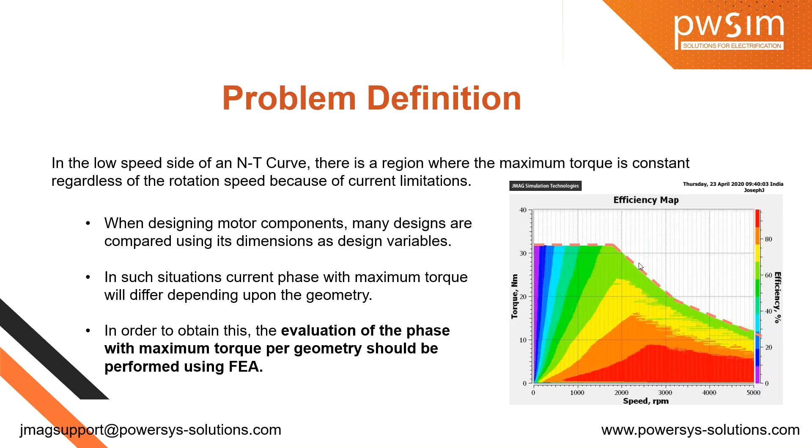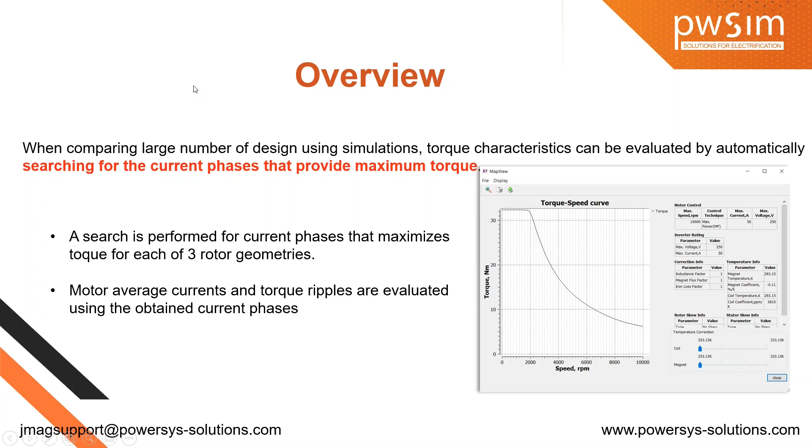So in the analysis, we'll be comparing three geometries. So it won't differ in the stator dimensions. Here for the sample we have taken, we are changing some of the parameters like magnet width and the position of the magnet from the center, and also the slit angle available in the flux barrier area. So these are the general assumptions which we have taken. So here the inner radius of the stator or motor thickness are approximately the same. So we are not considering much of the casing part.

So coming to the analysis model, as you know, we are considering the 2D model here in order to reduce our simulation time. And the partial model is done because here, as you know, the number of poles are 8 and number of slots are 48. So when we are taking the LCM, or least common multiple, of these two factors, we will get the periodicity as 45-degree angle. So the magnetic flux and all other contours periodically change.

Joseph, Sadeep here. Your voice is breaking in between. Can you come a little closer? Yeah, okay. Hope I am audible now. Yeah, now it's clear.

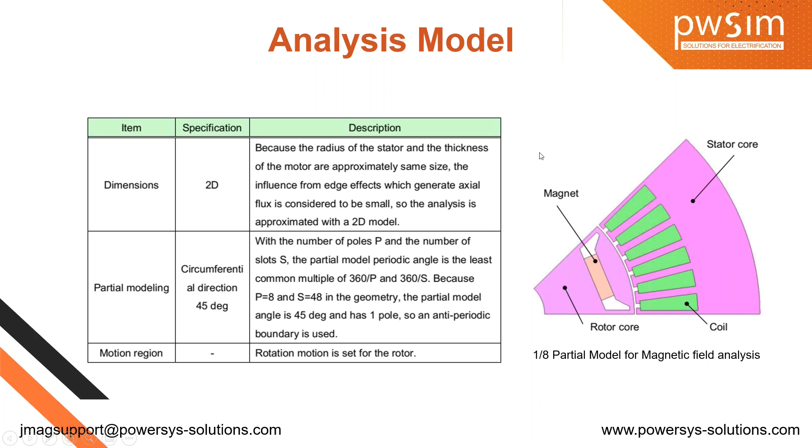So coming to the design variables and evaluation geometry, as I have already explained, you can see three geometries here. The first one is geometry 1. There you can see the position of the magnet is coming closer to the outer periphery of the rotor, and you can see some of the slit angle differences compared to the other two. So coming to geometry 2 and geometry 3, you can see the magnet width and slit angle are changed, and performance analysis is done for all three rotors.

So coming to the studies performed, you can see here in the first stage, we will be going through the inductance calculation and current phase search study. And in the second analysis, we will be getting the optimum current phase from the first analysis, and we will be performing the analysis in order to get the average torque and torque ripple values. Coming to the third analysis, we will be comparing the results of the calculation which we have previously performed with the analysis done with the FEA simulation.

So even though all these analyses are done in JMAG Designer, we will be having some scripting in the first analysis. So we won't be getting deep into the FEA in the first analysis. But in order to plot the torque and torque ripple curves, we will be doing torque analysis study 1. So in the later stage, we will compare torque analysis study 1 and torque analysis study 2.

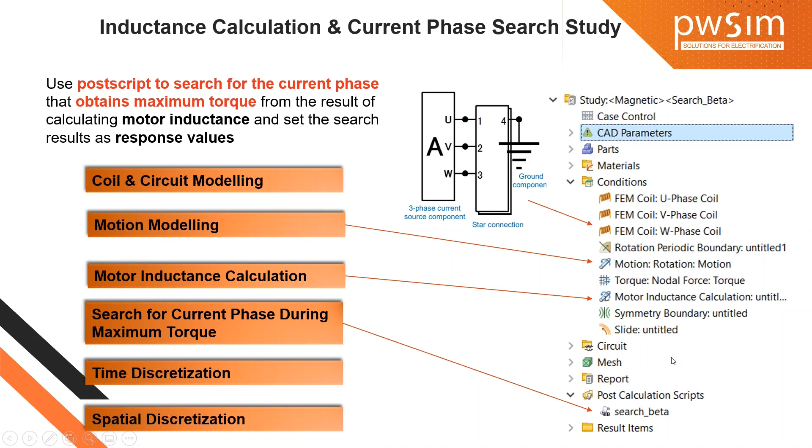So coming to the current phase results, we are automatically running post calculation scripts in order to obtain the torque value for each current phase, and we will be setting the current phase where the torque obtained is maximum. So this value beta is saved or set on the response table for further analysis. So as you know, this is the torque equation which I have already explained, and there you can see the phi value where phi f is the maximum armature flux value here.

So coming to the post calculation script. As I have already explained, in the post calculation script, you can see a VB script here. So this is the thing which I am going to explain just now. So here you can see in the post calculation script, the data are defined, or you can see the phase, Id value, Iq, Lq, Ld, flux and torque values are defined according to its data size.

So it is called for and defined like that, like a dim flux. In the bracket, you can see the type of data. So in set app equal to designer, the function calls GetCurrentStudy. So in the next analysis, we will be getting the data input from the current study.

So case number we are getting from the analysis, from the existing case which is executed there in the analysis, and division beta is also obtained from that analysis. So overall we can see case number, division beta, and number of poles are retrieved from the JMAG application study.

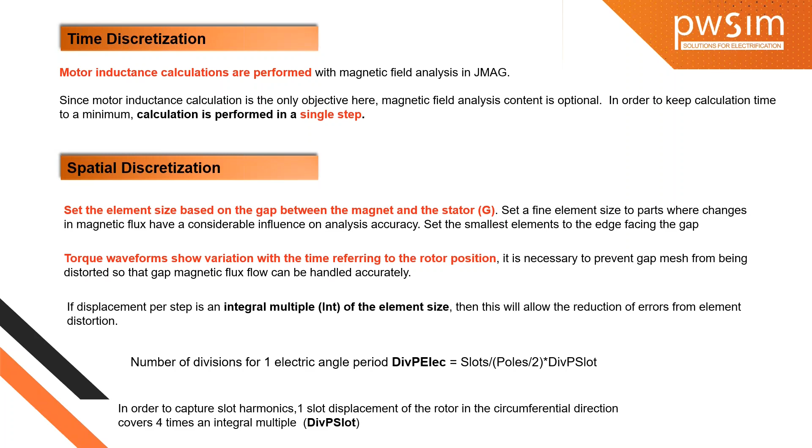So we'll set our divisions for one electrical angle period equal to slots per pole by 2 into divisions per slot. In order to capture the slot harmonics, for one slot displacement of the rotor in circumferential direction, we can see it covers 4 times integral multiple. So circumferential divisions is equal to the divisions per one electrical cycle multiplied with an integer value in order to avoid the calculation error. And you can see here only half electrical angle is taken in order to cover this circumferential division analysis.

Apart from that, we will be setting a rotational periodic boundary here, and we can see the symmetry for mesh also when we are setting the rotational periodic boundary here. As I have already explained, we have gone through the inductance calculation and current phase search study. So we already received the beta value and also the case number from the existing analysis.

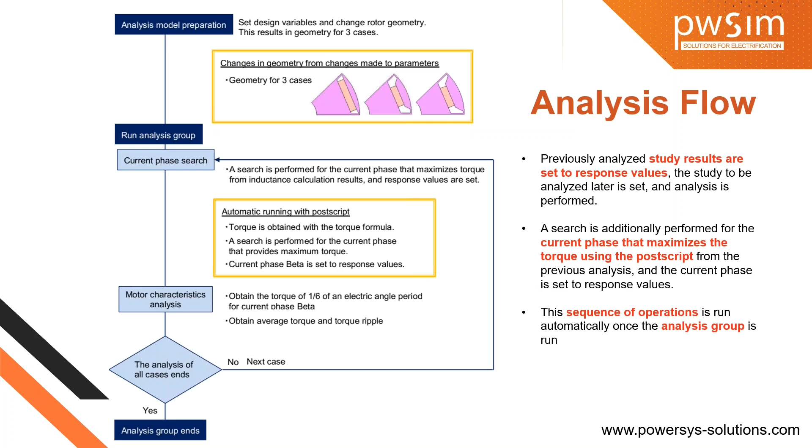You can see here, we started with inductance calculation and current phase search study, and we are coming to the next analysis, the torque analysis. The results which we have received from the inductance calculation and current phase search study are fetched into the torque analysis study 1. Here you can see the beta and case number is noted, and it is given to the torque analysis study 1.

In the properties of this current source, we will set this value for optimized beta. In the red indicated portion, you can see the beta value here. To evaluate torque characteristics and obtain the average torque and torque ripple value from the existing calculation, we are doing this FE analysis. No other details are changed compared to the previous case. Motion modeling is same as the above.

Circuit modeling is done here, and time discretization and spatial discretization are the coming modeling data. So here we'll start with the motion circuit modeling. Here you can see the beta value which we have retrieved from the post calculation script or from the initial analysis is given here in terms of a variable known as beta.

Coming to the project manager window, our aim is to generate response data with respect to each case. We will be generating the torque average and torque ripple, and we will be plotting the graph according to these particular values. So this is how we can see the values. Coming to the time discretization.

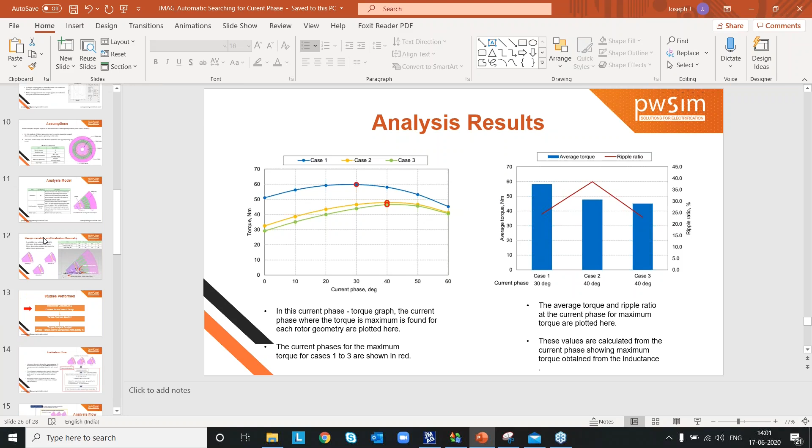So here you can see we have created an analysis group, as I have already explained. So here in the initial side, you might have gone through the analysis group. So this is the analysis flow, and we have created a group for that. So in the first analysis, you can see two studies have been performed within this group.

So as you know, an analysis group can be created by right clicking on the project model, and you can see create analysis group. So the main advantage of this analysis group is we can have a sequence for the operation which we are going to perform. So here, if I am editing this analysis group 1, you can see in the order, I have performed the operation for searching the beta, and I have performed the motor NT calculation, basically based on the FEA calculation. So these two studies have performed in a sequential order.

In the first phase, it is retrieving the beta value, and in the second you are getting the torque value. So this is how we can perform the analysis. So here you can see the studies which are coming under the analysis group. The first one is search beta. Second one is the motor NT curve analysis. So here you can see I have already run the model in order to save the time.

So here you can see I have registered the beta value which is optimized from the post calculation scripts. And in the second stage, I have created torque average and torque ripple value for the existing beta case. So here I have plotted that. So you can see here.

So here you can see in the table we have performed analysis for 3 rotor geometries. So the beta values which we have returned from the post calculation scripts are as follows. For the first case, it found 30 as the best optimized value, and for the second rotor geometry, it is found that 40 is the optimum value for the beta. And in the third, you can see 40 again. 40 is selected as the best beta value for the current analysis. So according to that, you can see the torque values also here.

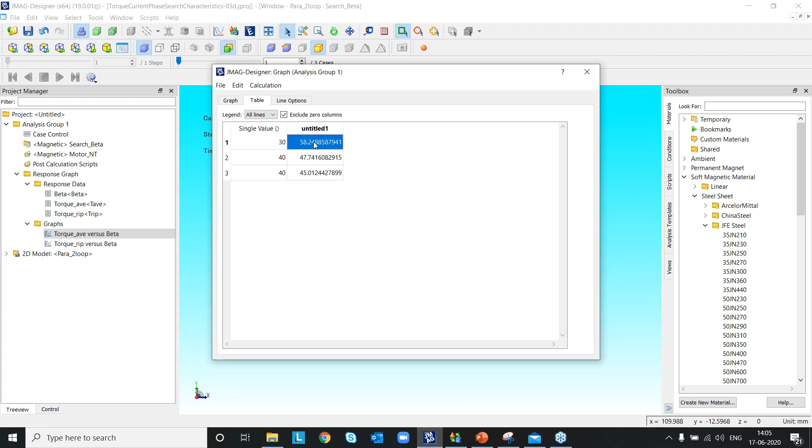But again we can see here the maximum torque is obtained for the rotor type of case 1. So maximum torque is obtained for this particular rotor geometry 1, and there we can see the average value which we have received is 58. So this is how we can see the results. So coming to the graph, you can plot the same thing which I have explained just now in this way. So you can see the 30. So these are the angles at which we have performed the analysis, and 30 is the optimized value.

And here you can see for case 2 and case 3 we are getting the maximum value as 45, and here you can see 47. So from this particular analysis, we have found that our geometry 1 is getting the maximum torque with minimum phase angle, that is 30-degree phase angle. So this is how we can see the results in response data.

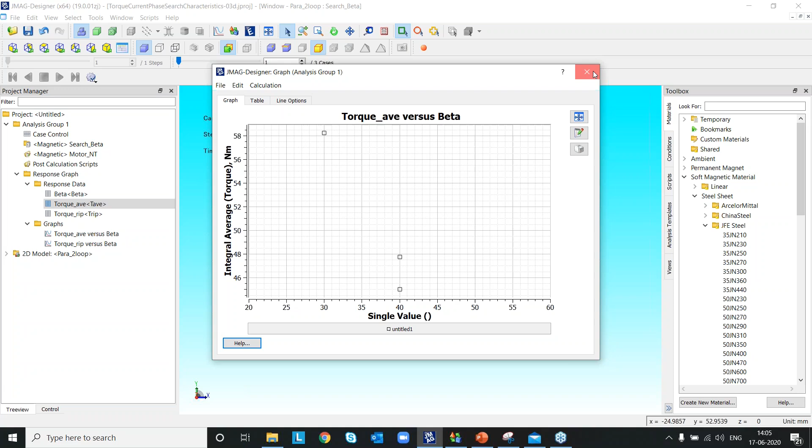So coming to the analysis group, these are the first 2 analyses which we have done here. So these 2 studies we have grouped under analysis group 1. The same thing is grouped there.

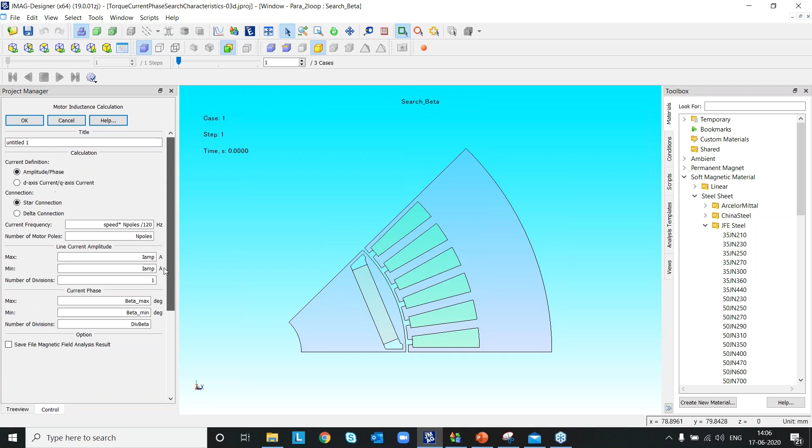And coming to the third analysis, which I have explained in the slide, you can see here under the condition the motor inductance calculation tool. So this is the motor inductance calculation tool. The things which I have explained there are already shown here in the project manager window. So in the motion region, you can see speed is defined as a variable here. And coming to the boundaries, you can see the mesh settings here. So here, as I have already explained, the mesh is defined for each part.

So here you can see minimum element size is given for the air gap area in order to reduce the error which occurs during the rotor rotation. And here you can see element size is defined for each particular part.

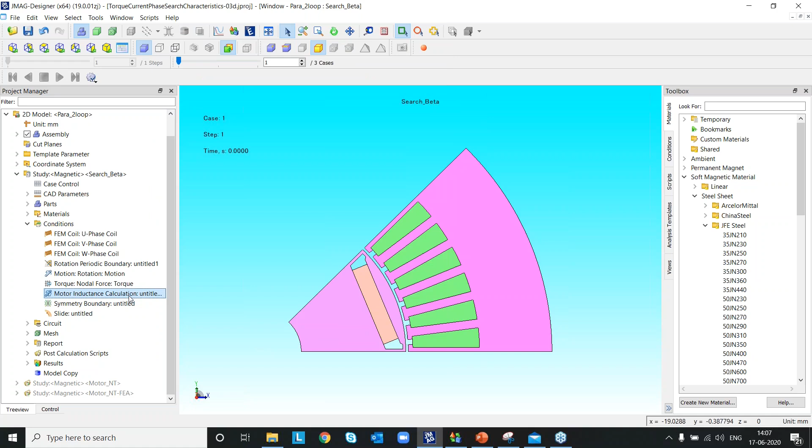So we can generate. And as I have already explained, we have performed the analysis only for 1 step, because our aim is not to get the magnetic field analysis data. Our aim is just to get this motor inductance calculation data by using this motor inductance calculation condition here. So this is performed over 1 step, the first case.

And in the second study, you can see, as I have already explained, we have performed it for 17 steps with time step equal to this. So I have already explained about the number of steps calculation and time step calculation here. So I have performed like that, and we are getting the results. So we already have seen the values here. So the same thing is explained here also.

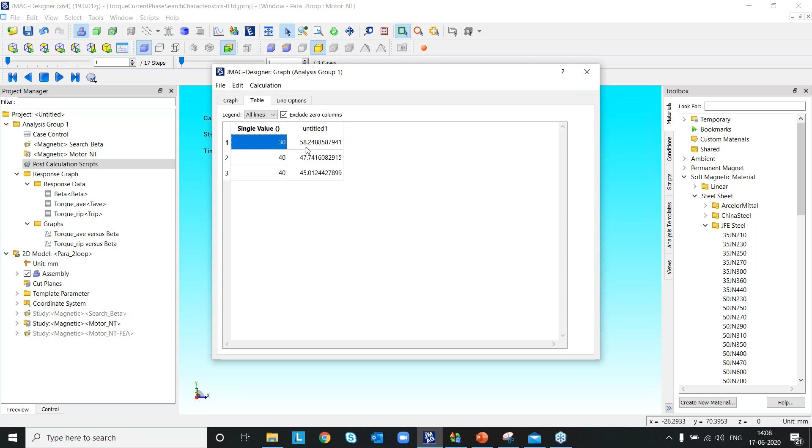In the analysis group, we have obtained the torque value here that we have received from the motor inductance calculation. So now, we already found the beta value and torque value here. So here already we found that case one is where we are getting the maximum torque. So for the same case one, existing rotor geometry, we are performing the motor inductance calculation with FE analysis.

So here you can see we are performing this FE analysis only for case one of rotor geometry, and there you can see the case control. So when I am showing the cases here, you can see our parameter is beta A, which means we are parameterizing the beta value from 0 to 60 with 10-degree increments. We are just finding out the best beta value for getting the maximum torque.

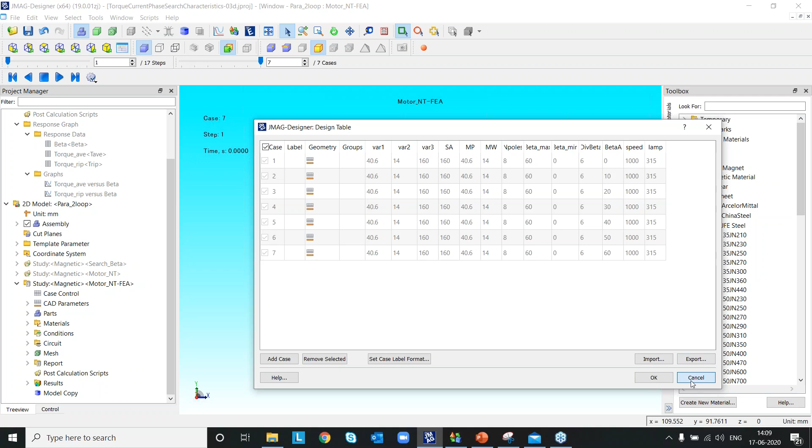So instead of the post calculation script in the third study, we are just parameterizing this beta value, and we are just calculating and comparing the results here. So coming to this, you can see in the results for this also I have done the analysis. So here, as you can see, I have plotted torque versus beta. I have performed from 0 to 60 in 6 increments.

So at 10 you can see we are getting around 52.52 Newton meter, and at 20-degree beta angle you are getting 56, and at 30-degree we are getting the maximum value 58.2488. So we are performing the analysis only for case one compared to the analysis which we have done previously. There, in order to save time comparing all these results, we have used post calculation scripts to get the optimum value for beta where we are getting the rotor torque value.

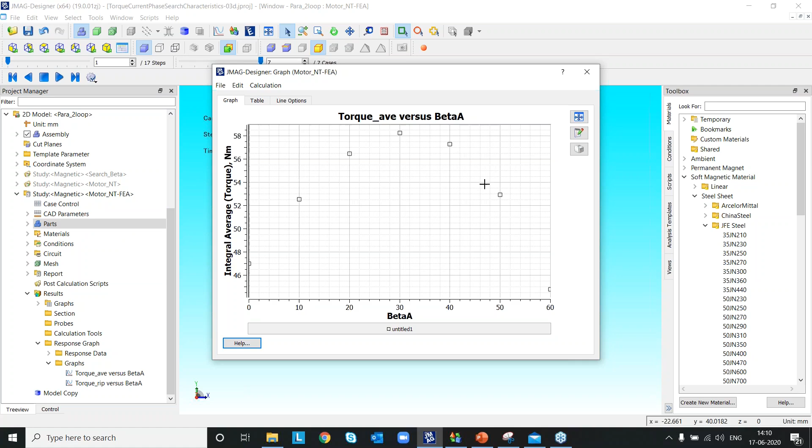So this is how we can see the results here. So we are just comparing this. Actually, here you can see also the torque value is obtained for 30-degree phase angle. There also we have received the value for 30-degree angle. This is how we can see the ripples also.

So here when I am clicking on ripples, you can see the maximum ripple is occurring at a 40-degree angle. So we need to operate at a particular angle of 30-degree in order to reduce the ripple. So here you can see the ripple rate is 24.37%. So if you are rotating your motor with 30-degree beta angle, we will be getting the ripple rate as 24%. So this is how we can see the analysis.

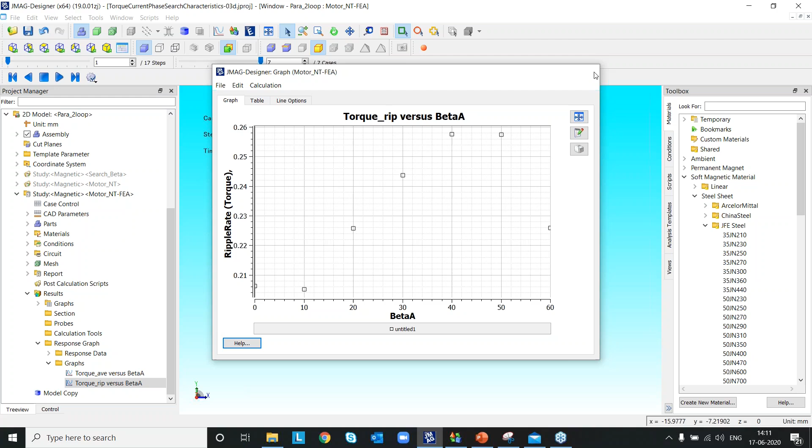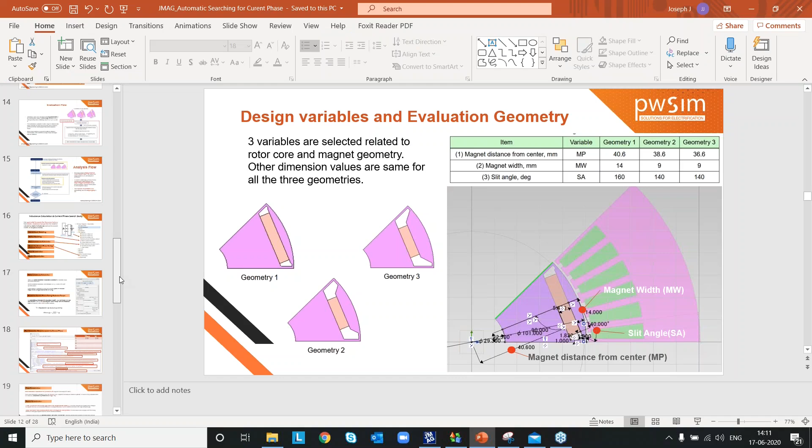And comparing to the results here, initially we have done the analysis for case one, case two, and case three. There, as I have already explained, we have performed the analysis with increment from 0 to 60-degree. But this analysis is done in post calculation script instead of doing it in FEA in order to save time. So we will be getting the data for case one. That means for 30-degree, we got the result of 58.58, and we got maximum torque at 40-degree for case two and case three.

So this is how we can plot using an Excel sheet, comparing the results for torque ripple and average value. Here you can see in case one, the existing rotor geometry, we got a 58.58 value at 30-degree, and for case two and case three we are getting much reduced values compared to the first. But coming to the ripple rate or ripple ratio, here you can see it is more for the case two geometry.

There you can see it is formed at a particular angle of 40 degrees. So this is how we can see the results. We can plot the ripple ratio and average torque value with respect to the results which we have obtained from JMAG-Designer. So coming to the observational part.

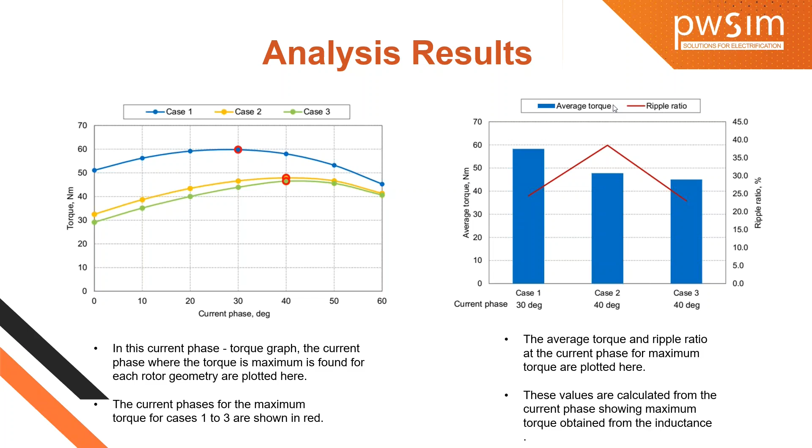In the observation part, we can see we are comparing the results. So there are two analyses. Even though the two analyses are based on FEA, we can say the second one is more into FEA, because in the first one we have used the post calculation script in order to reduce the time required for the calculation. So the second analysis is purely based on FEA, and we are comparing the results which we have received from the torque equation and from the FE analysis.

So here you can see the value is almost close to the analysis. In the torque formula, you are getting more torque compared to the FE analysis because there we are not considering the variable value for inductance. Or we can say the saturation is not considered in the first case, which we have performed using a torque formula. But if you want to see the results based upon the saturation factors, you need to do the analysis based upon the FEA calculation. So this difference is because of this fixed value calculation based upon the post calculation.

But we found one more thing. The best angle or the phase angle is 30 for each case. So here you can see, even if you are using the torque formula, the phase angle is found at 30 degrees in order to maximize the torque. And if you are changing it into the FEA domain also, we are getting the maximum torque value at 30 degrees. So here you can see the geometry finalized based upon our calculation. So this is how we can see the results. So this is all about our observations and the analysis.

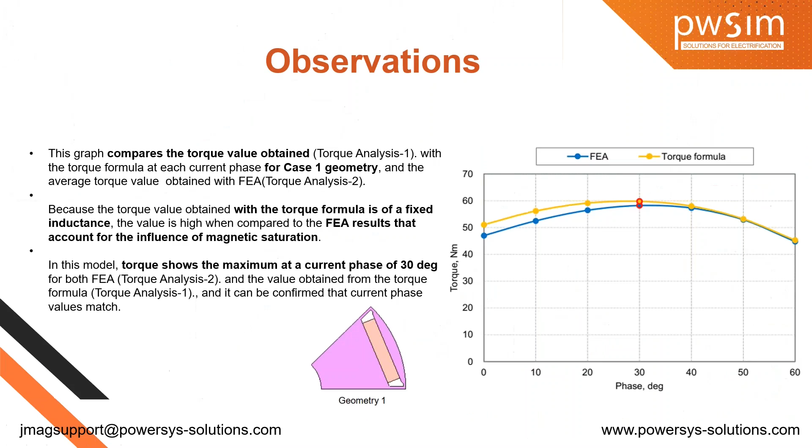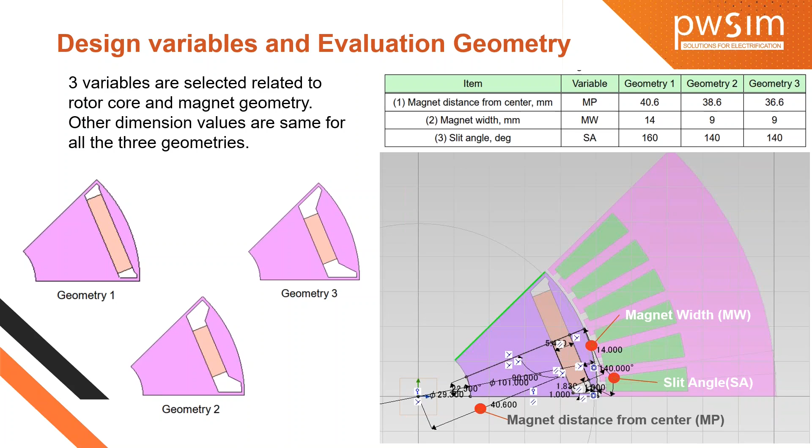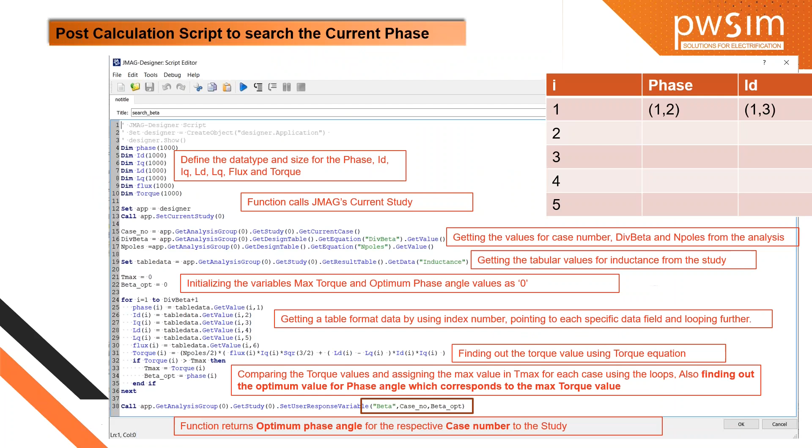So hope you have gone through the analysis and the procedure we are following. As I have already explained, we have covered the inductance calculation. We have gone through the three rotor geometries with specific variables like magnet width, slit angle, and magnet distance from the center. In the second stage, we have performed the inductance calculation study, and we have performed the post-calculation script analysis in order to get the maximum value using this post-calculation script. And in the second analysis, that means the torque analysis study, we used the existing beta which we have returned from the post calculation script.

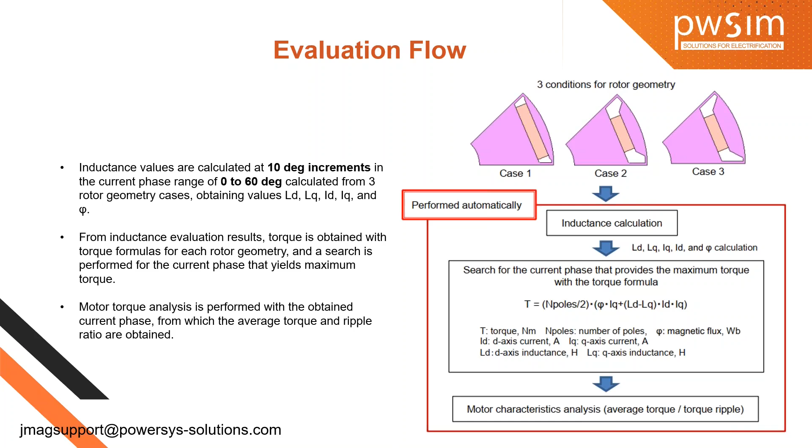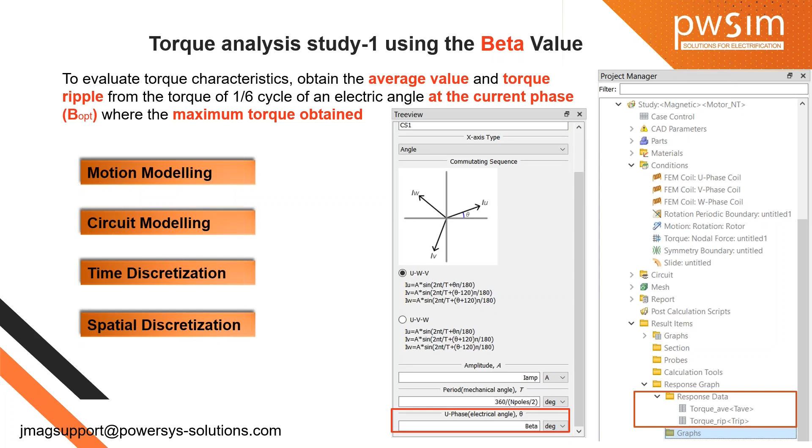We have done the analysis, torque analysis study one, and here you can see the beta which is assigned in the torque analysis study in order to get the maximum torque value. And in the third analysis, we are just comparing the results which we have obtained using the post calculation script and which we have found from the FE analysis, whether it's right or wrong, or whether it is appropriate or not. So we can say it's an advantage over the FEA.

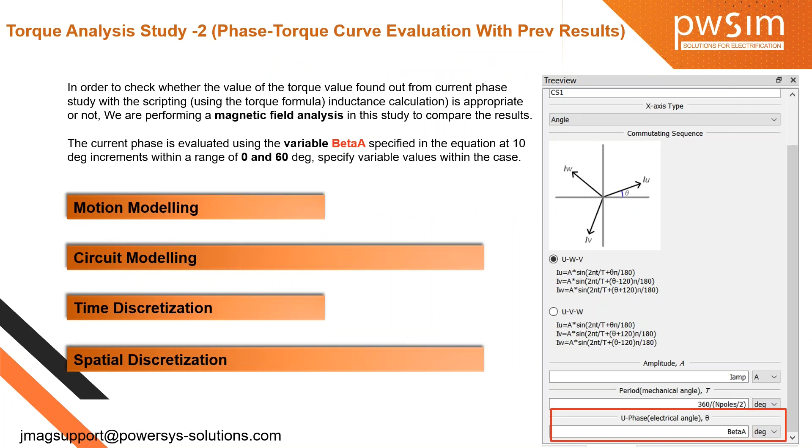FEA analysis has much advantage over the torque analysis, but with large design data or large design templates, in order to save time, we can reduce the time by using the scripts, and we can finalize a beta value and the rotor template for which we have optimized our torque value. Later you can analyze torque analysis study two in order to have a better understanding of your particular model. So this is just for saving our analysis time, and to find out the maximum torque value and the current phase angle that corresponds to it. So this is all about the analysis and observation, all about this current phase tracking.